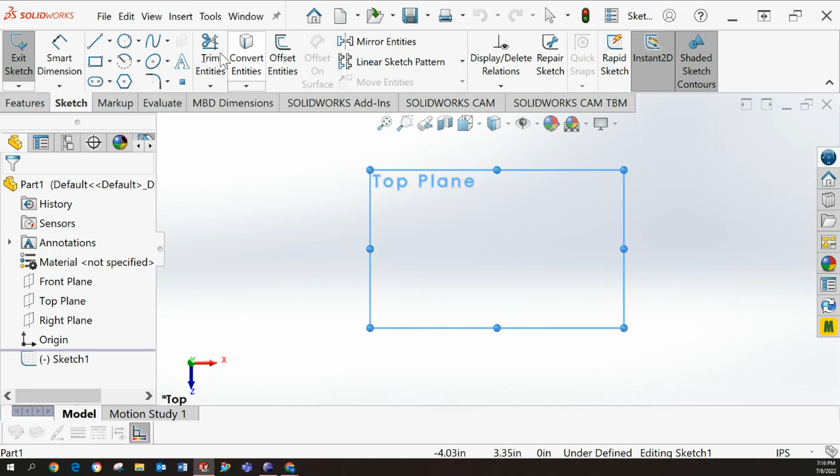So first we'll start with a sketch. So we'll go up to sketch, we'll select top plane, and we'll just use a small circle. So we'll sketch our profile and hit OK, exit sketch. So we have our circle.

So we want to extrude the circle upwards. So we'll go to Features. We'll click on Extruded Boss Base. And it'll ask us to select a plane or a sketch. So we'll click our circle. And then you'll see the preview start.

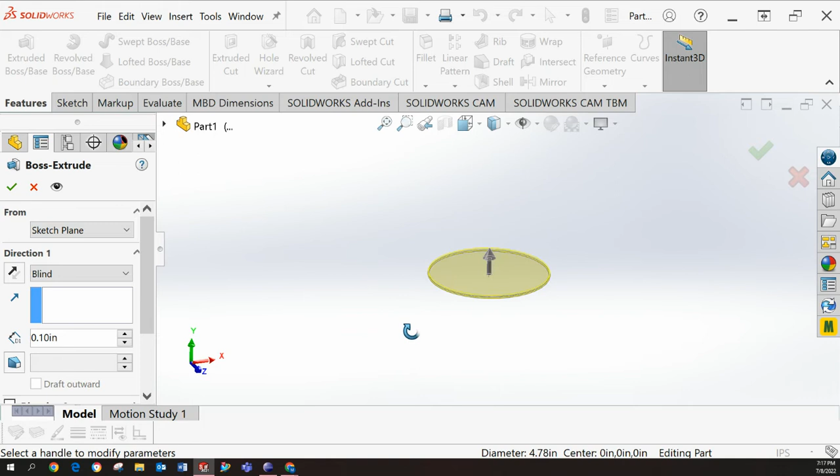Now we can adjust how far we'd like to extrude. So we can either drag the arrow, or we can go over on the left and type in a certain number for our distance.

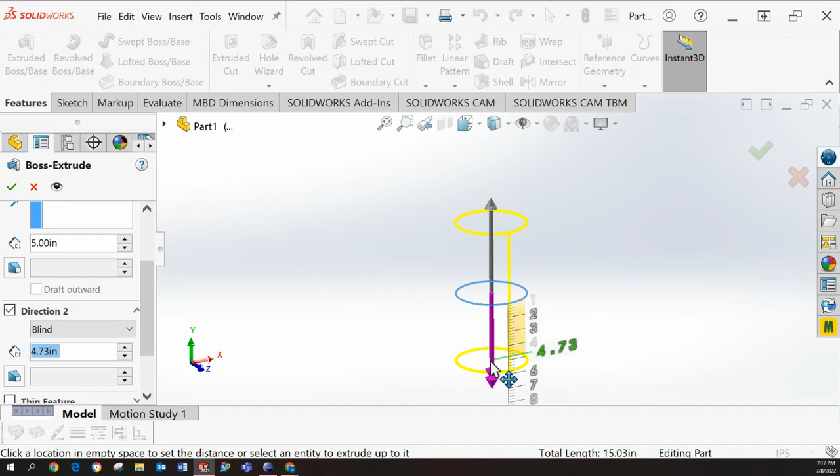And if we'd like, we can go and hit direction 2, and we can extrude in the opposite direction, and then hit OK. And you can see we have created a cylinder.

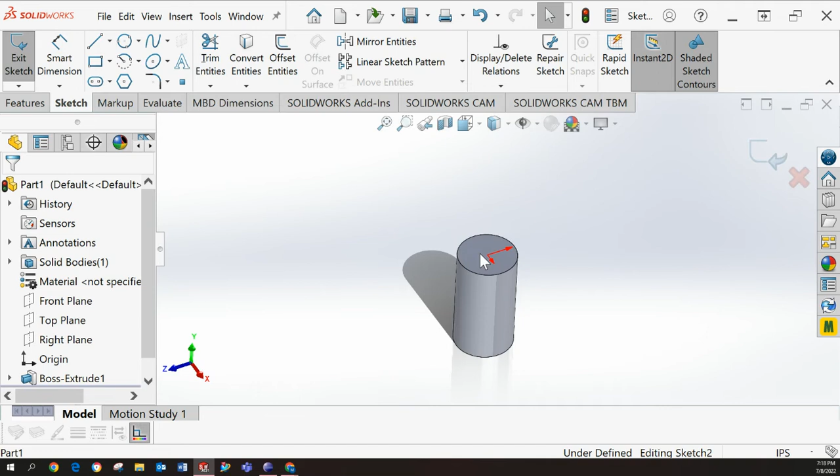Now maybe you want to do a second extrude off the top of this cylinder, so we can do the same process again. We'll say sketch, and we'll click on the surface, and then we'll do another circle. Hit OK, exit sketch, and then we'll go back to features.

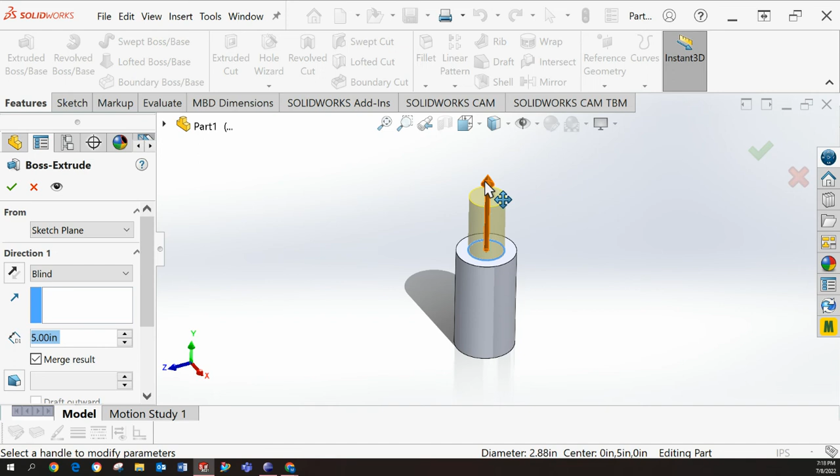We'll click Extruded Boss Base, click the new circle, adjust our extrude height, hit OK. And that is how you use the SolidWorks Extruded Boss Base.